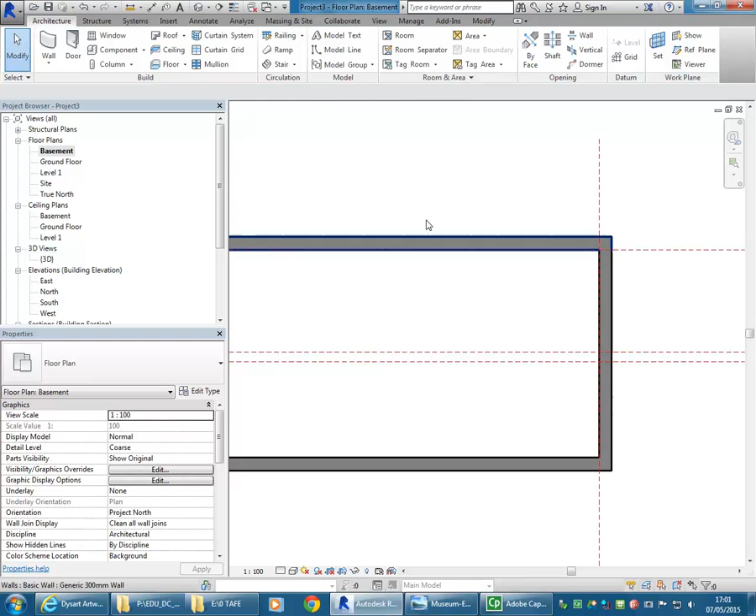When you click on the stair button, I'll show you which tool is which from the options you have over here. If you see options for this U-shaped stair with winders and a spiral stair, you've gone to the wrong one - that's an assembled stair. It's actually useful if you ever want to do a full step spiral, but otherwise I think it's more difficult to work with. So I'm going to cancel that and instead click on the arrow next to stairs and go to stair by sketch.

It's really easy, and you can do almost any kind of stair you like, except for full step spirals - they're difficult. So if you need to do a full step spiral stair, in other words one that goes the full circle, then use the new one. But otherwise just use the old one, and it's really flexible.

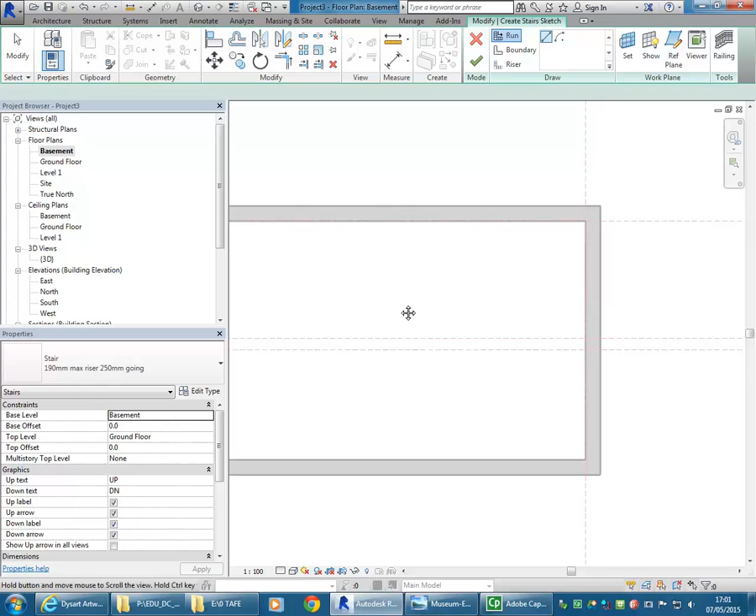So the process though is the same whenever you make a stair. After you've started the stair off, that gives the level that you're starting from. It's starting here from basement, you can see, and so therefore in properties you can see the base level is set to basement, and you should always check that the top level is going to the level you want it to.

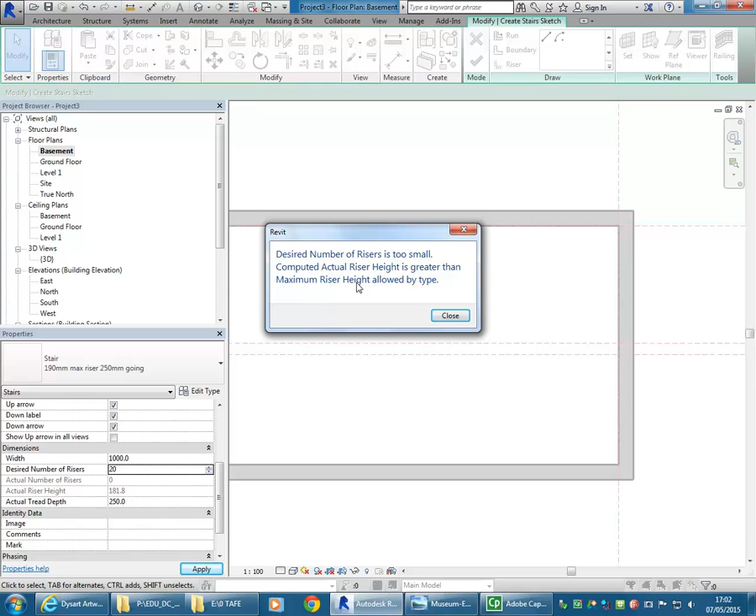And then if you go down further in your properties panel, you'll see the desired number of risers. Now we need 20 risers, so I'm going to change this to 20, and it's going to give me an error - it's going to tell me the desired number of risers is too small. Right, so I can't make a stair at the moment with 20 risers because of my levels. So I'm going to cancel this one again.

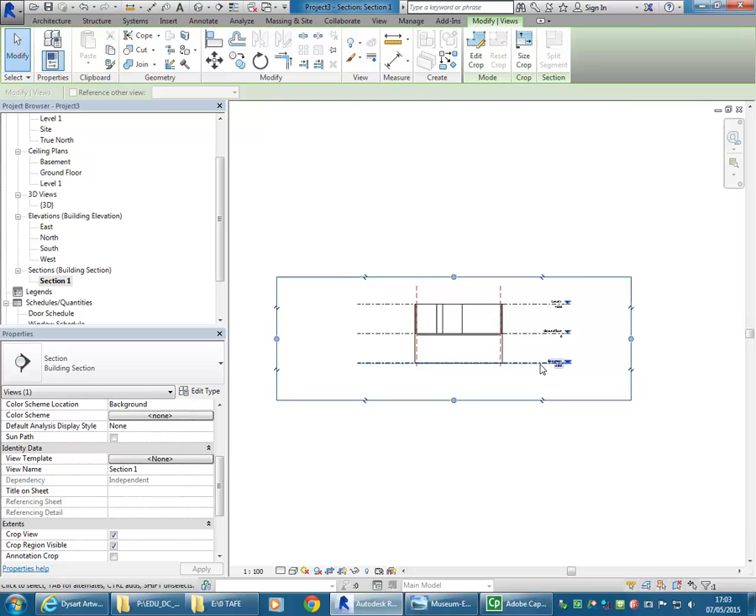Yes, to discard, and go into my section, or an elevation view would be fine. Here in my section view, I can't see the level that I need to adjust, so I'm going to drag that crop region lower so I can see my basement level. Okay, so hopefully you can see from this, but before you even go to make your stair, you need to think a little bit about the levels that you're going between. And there, the basement level needs to be a bit higher, in other words.

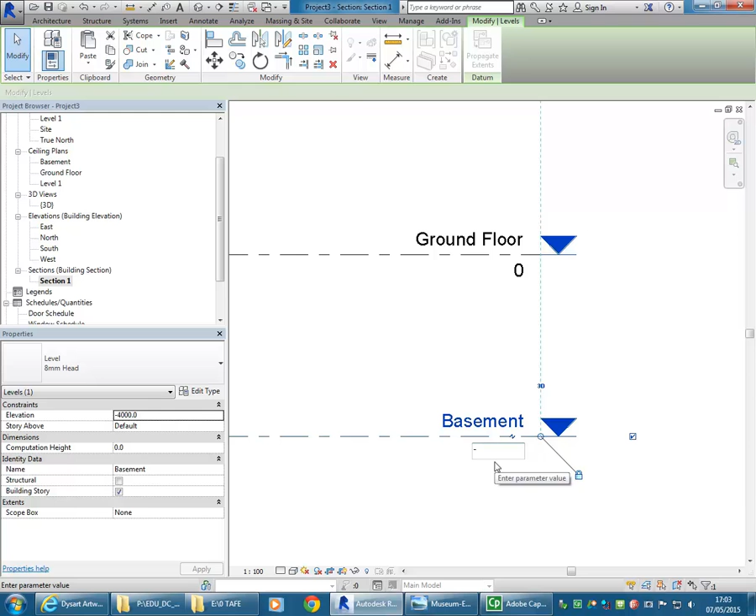So I'm going to change that to minus 3,500, which is about the height it should be. Here we go, it's 3.2 metre ceiling height, and if we allow about 300 for the floor structure, that's going to give us 3,500. So now I'll go back to basement, and then again using stair by sketch.

This time again with the levels there from basement to ground floor, I'll go down and it tells me the desired number of risers is 19. We still want that to be 20, so I'm going to increase that to 20, and this time it's worked. And the reason it didn't work before is because the risers would have gone above 190, which is the maximum allowable, and Revit won't let you create a stair that's not allowable.

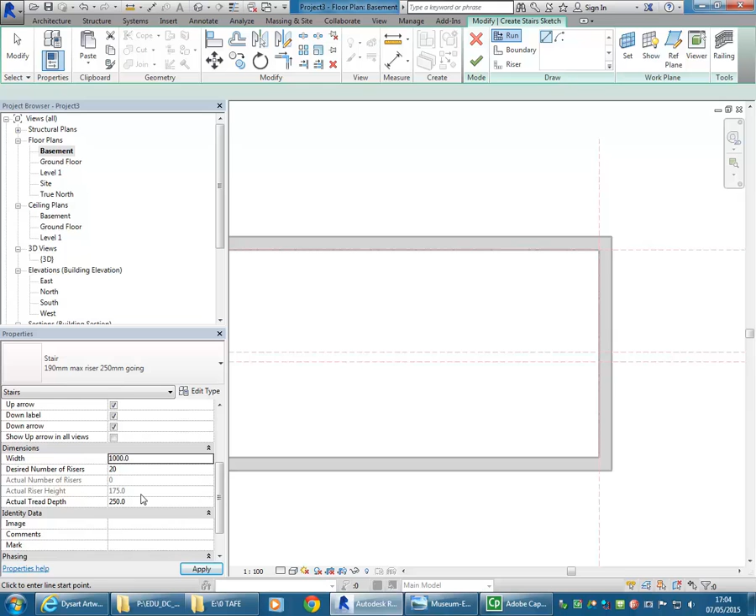So you need to have the levels set up so that you can have risers of at most 190, and that should be the design process that you're following anyway - you should be thinking about the levels first before you go to create your stairs. Always check the desired number of risers before you go to make your stair, and the width as well. We're lucky here, the width there on 1,000 is pretty close to what we want, so I'm going to leave that, and then I can start drawing the stair.

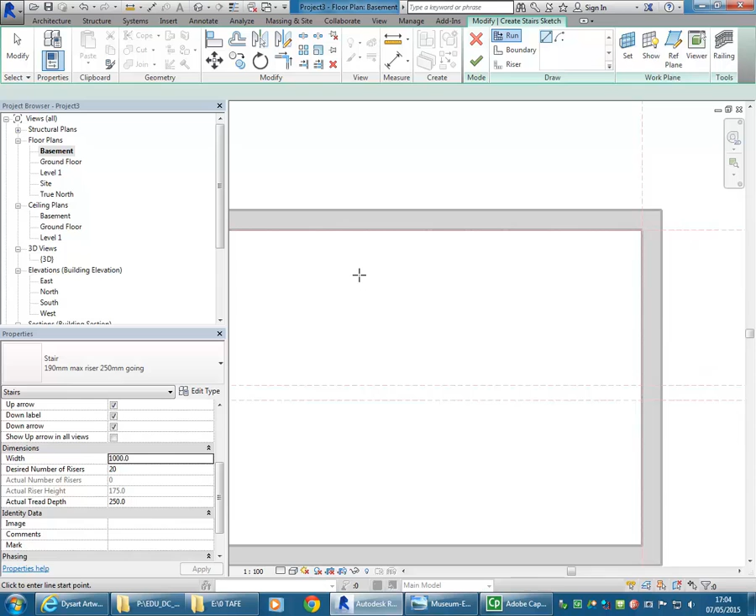So if it's not letting you draw anything, just make sure you've got the run tool with the line option selected up on the ribbon, and then I'm going to click a point to start my stair. Moving across to the right, you can see then in that grey text it's counting the risers. So we want an even number of risers in each flight.

Do you know, if you're going to design your own stairs, do you know what the maximum number of risers you can have in a flight is? Looked it up? No? So you should be looking these things up in the BCA, because you'll need to design your own stair and it'll have to comply with the BCA.

18 now, it used to be 20. So it's section D, it's got all of that. Section D of the BCA.

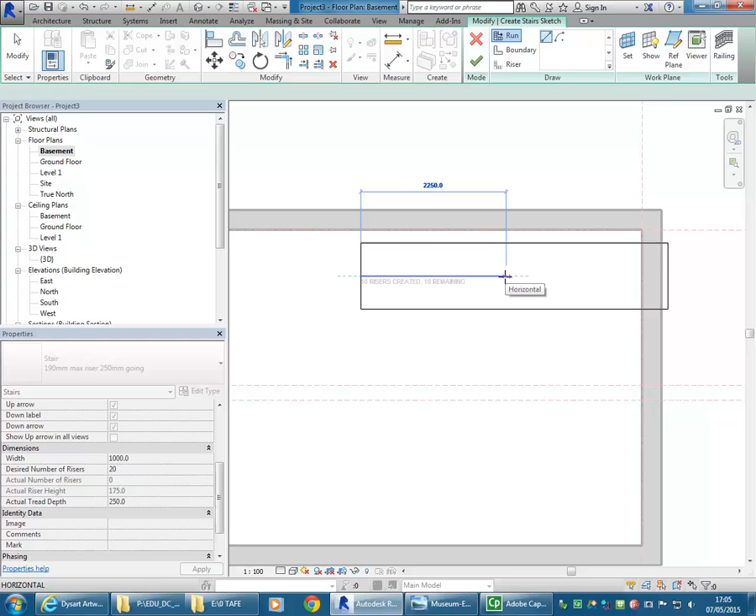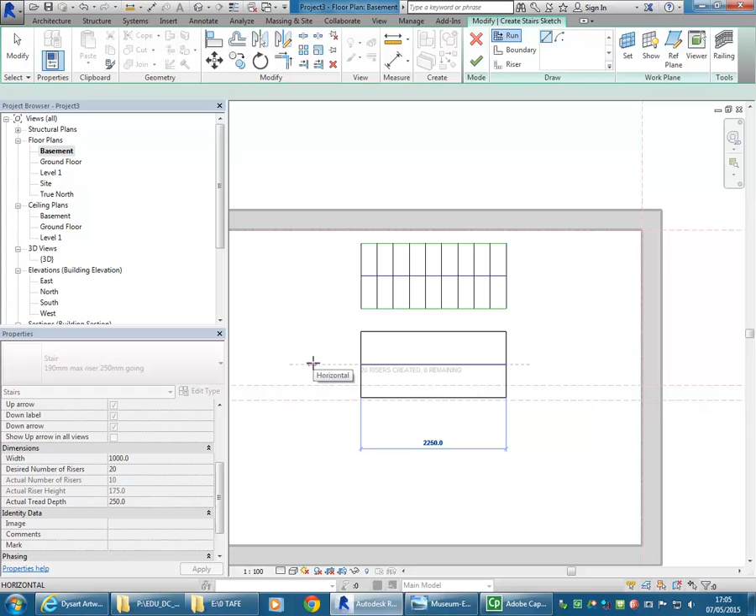Okay, so we're going to need 10 though. So I'm going to do 10 here, that's fine. And then I'm going to bring it down so that it gives me the extension line from the last riser, and I'll start my new flight there, take it across to the left and go all the way to 20, which I can see is what it tells me there in grey.

So I'll click, and now you can see it's giving me 2 flights of stairs in a U shape, but I want to move that so that it's up against the wall. So I'm going to use a window left to right and select the top flight, or the first flight, and I'll use the move button, pick it up on the corner, and I can snap it onto the wall. Notice it keeps all the lines joined for you. And then I'll do the same with the bottom, make a window around that bottom flight using the move button.

Then I can click onto one of the corners there and then bring that up to the reference plane that shows me where the wall on the upper story is. Okay, so that's taking care of the top and the bottom edge.

Then now I want to move the whole thing over to the right, so I'm going to select all of it with a window, and then again click the move button and pick it up on the edge on the right hand side and snap that to the edge of the wall. So that should fit exactly up against those walls there. Tick to finish, and it'll create the stair for me.

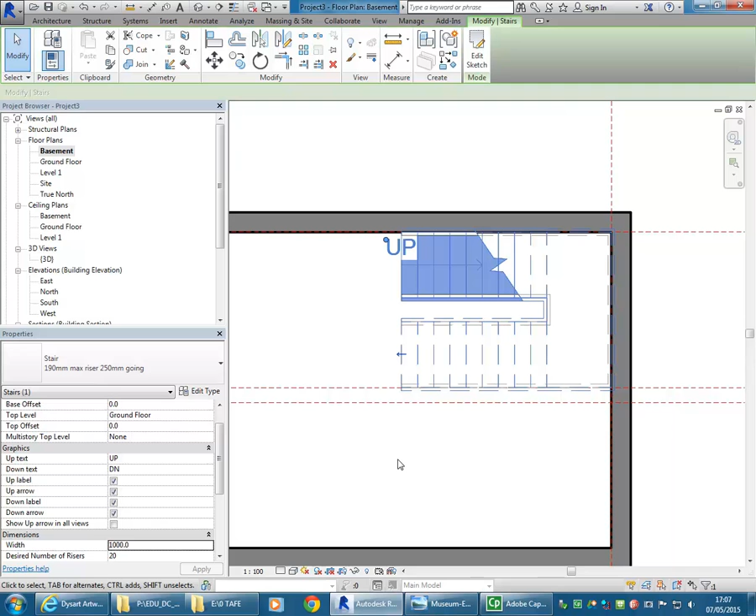We can view that in 3D to have a look at it, so I'll do that with a camera view. I'll just create a camera on that lower level, and there's my stair. Problem is, of course, that it's going into the floor.

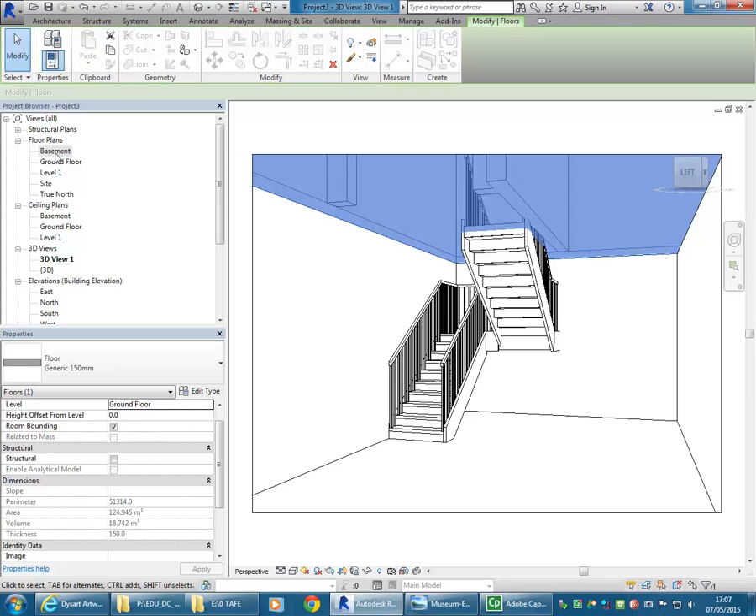So now I need to go back into my floor plan. Notice I've selected the floor, and so I'll go to my ground floor, floor plan, edit boundary, and then I'm going to use pick lines to pick the edge of my stair and also the edge of this wall, and then I can just use trim to join those lines together to create the corners there, and that'll take out that corner of the floor.

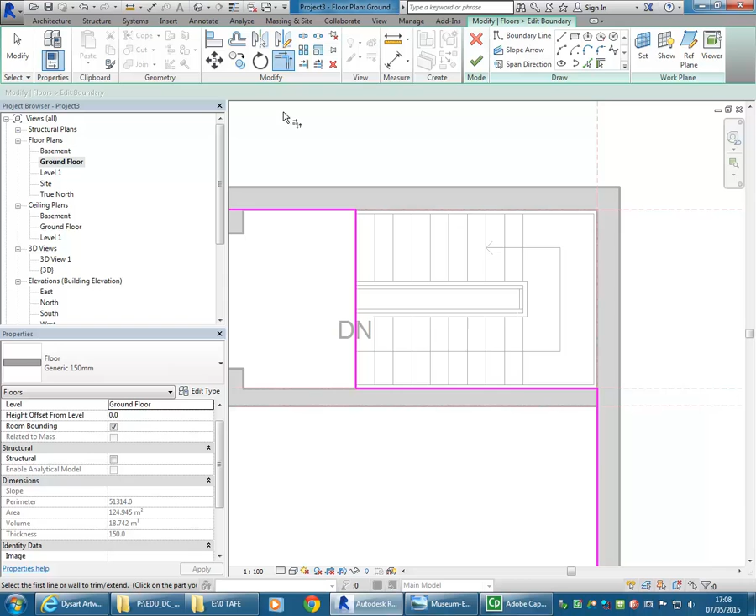Again, tick to finish, and it'll ask me about attaching. Again, I'm going to say no, just like before, and look at it in my normal 3D view, where we can see now we've got the stair in there.

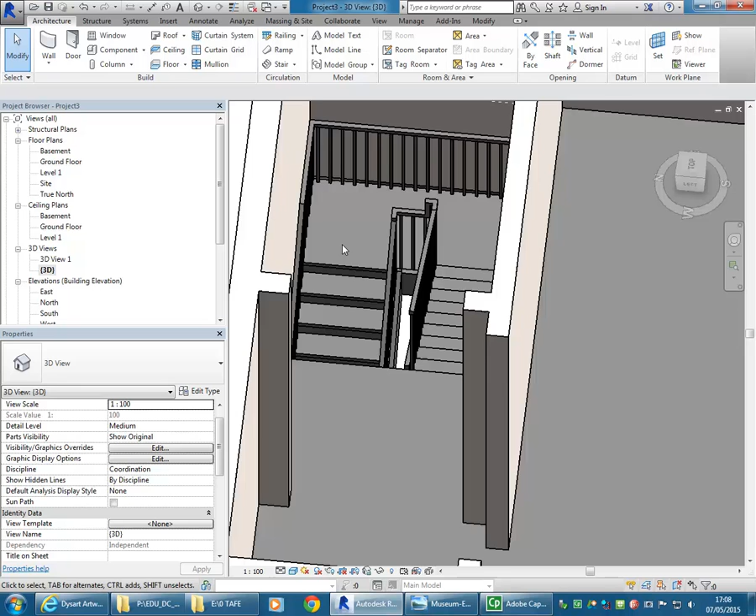Which has a pretty terrible railing, but because we're going to replace this stair afterwards with something else, I'll just leave that for now. Or if you want to, actually, I'll just select that and the inner one as well, and it's a simple thing to change it to a slightly nicer railing like this pipe railing, or the glass one if you have there as well.

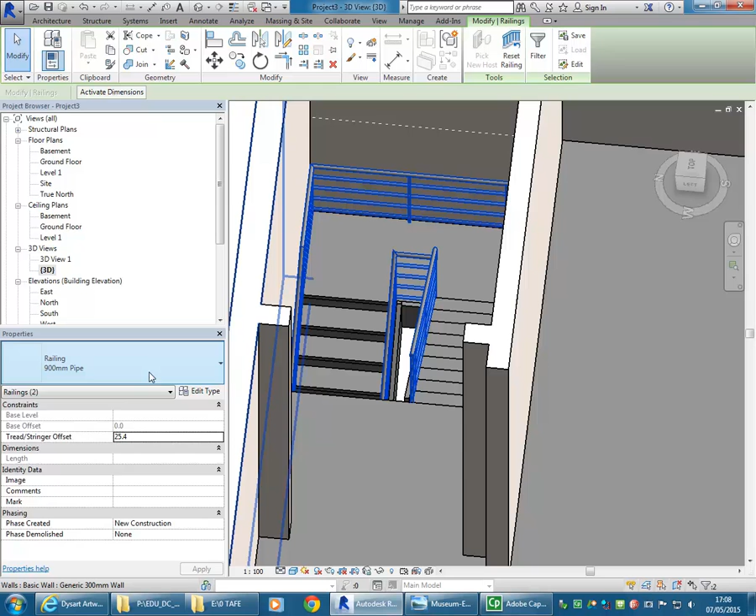Okay, so that's probably as far as you need to take the stair initially.

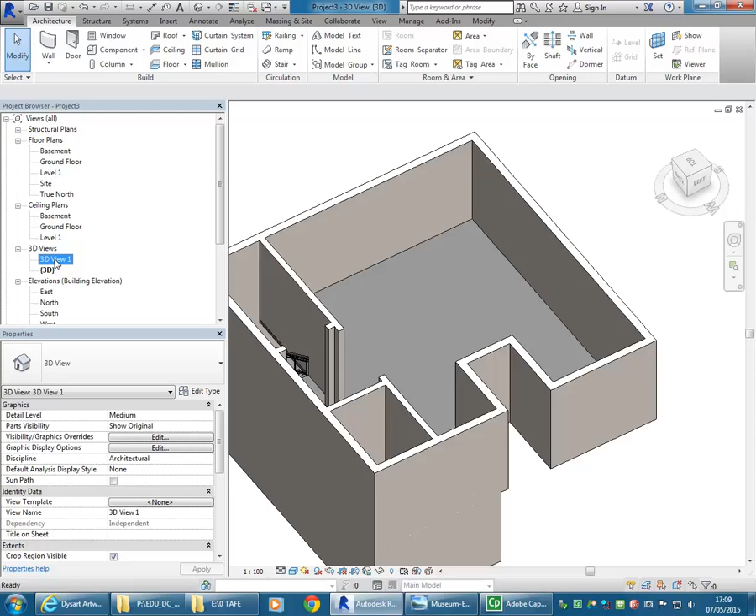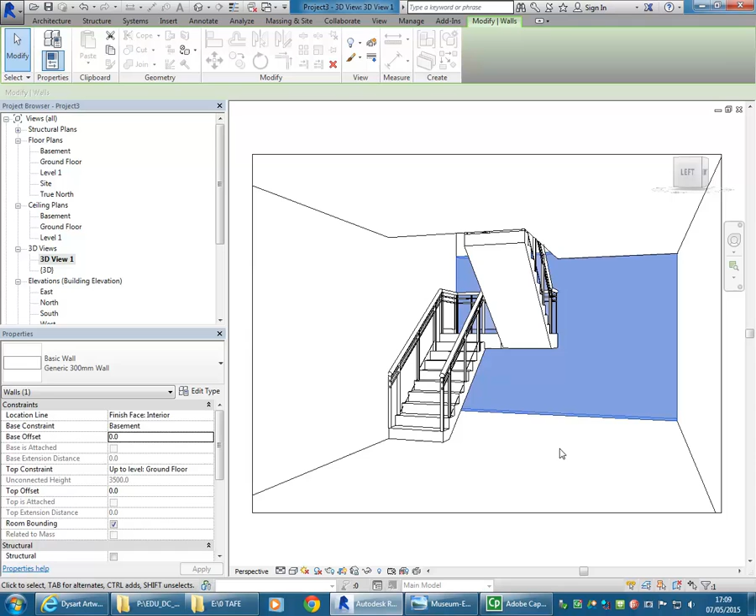So in the 3D view, maybe I'll just show you, if you want to change it to a different construction, you can experiment with those different stairs that you have loaded as well. So you can always change it to the more industrial one, or the monolithic stair, which is a concrete stair. It'll give you a warning, but that's okay. So that'll give you basically a solid kind of stair. But I'll just leave mine on the default for now, or actually the industrial, I think.

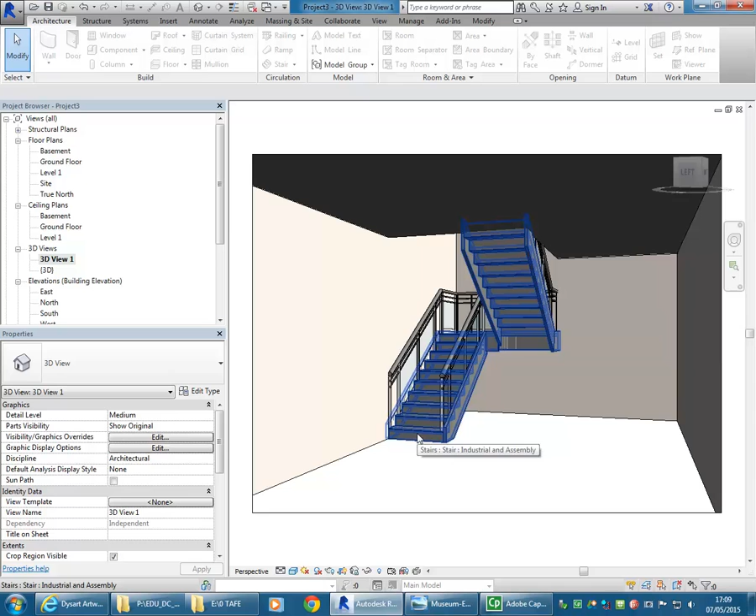There we go, so that'll do for stairs for now. You can do a lot with the stair tool though, but I'd highly recommend though at first you stick with stair by sketch, and maybe just to quickly show you stair by component why I wouldn't be using it.

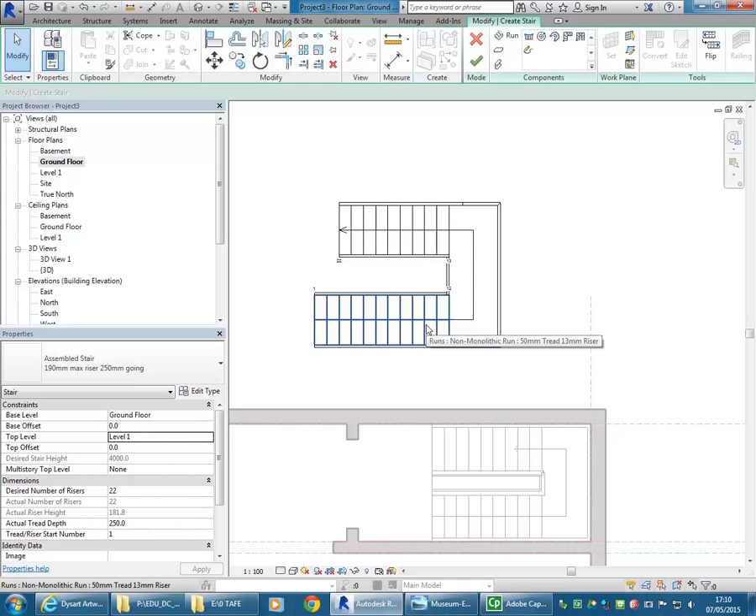If I draw a run using this tool, I can do basically the same thing, but I'll select it and then show you, if I try to edit this now, edit stairs, notice there's no option to edit that sketch. If I select any of those elements, I've got to convert it before I can edit it, and it's a lot of work. I'll delete that one.

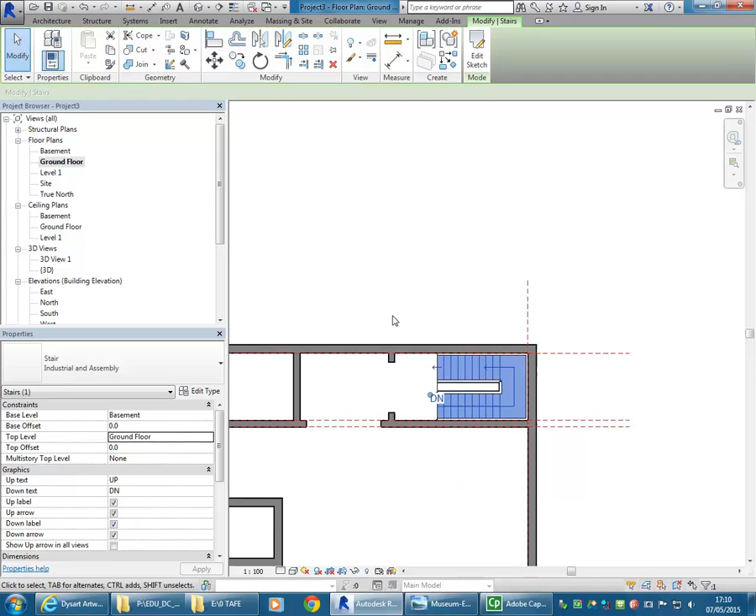The other stair, I can just choose Edit Sketch, and it takes me straight to the lines, and I can easily modify that. So it's much easier to work with than the new one, which has some good advanced options, but it's probably not what you'd want for this project.